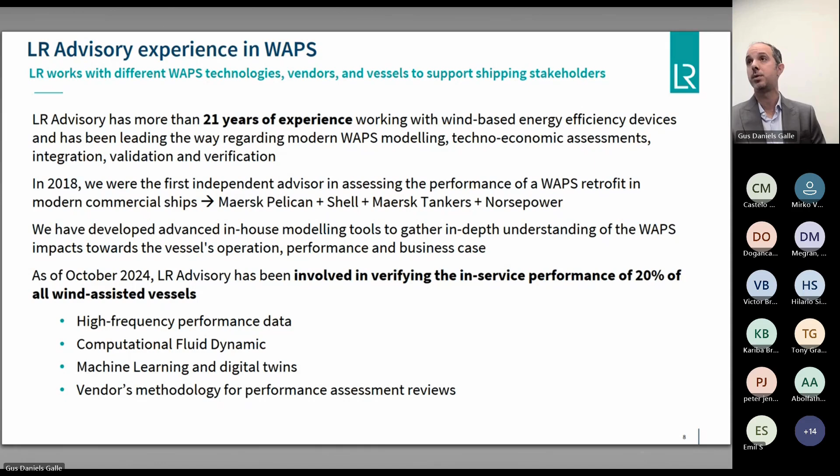And I think the best example of that pathway is the one that we have with Wisby Tankers, LDC, and bound4blue. When we started with LDC, they asked us, is wind propulsion for me? And we went through the operation profile of the vessel, trying to understand what is the opportunity that they have. Then we sent questionnaires to different vendors to ask, what is the performance prediction? What is your business case? With that, we gave insight to LDC so they can make a decision out of that.

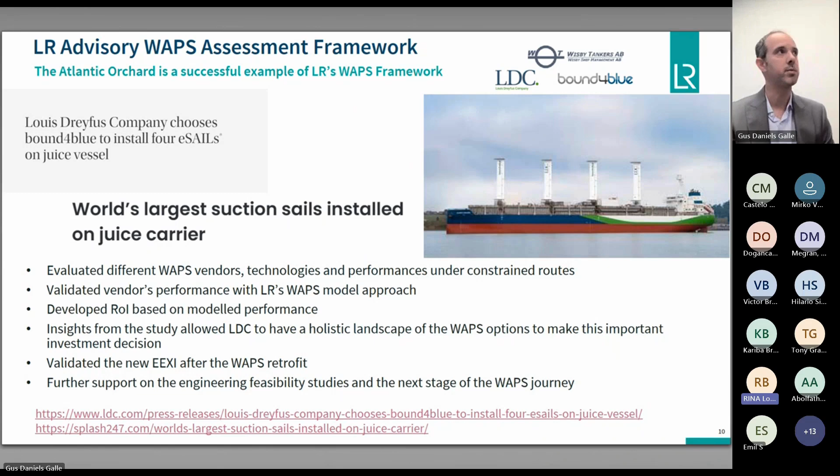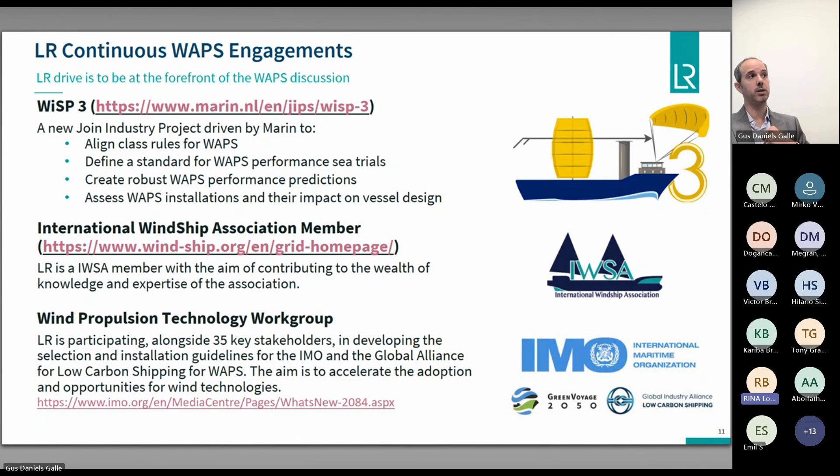And as well, we're part of different projects and initiatives. So to support the adoption of wind propulsion, we're part of WiSP3, led by MARIN, to try to consolidate class rules to create robust wind propulsion predictions for everybody to adopt and trust the numbers that are produced. We're also part of the International Windship Association, and we are supporting the production of the first guidelines from the IMO on the GreenVoyage2050 Global Alliance for understanding how to deal with wind propulsion systems. So we try to be really active in the field to support what our clients bring to the table, so that can be reflected in the general guidelines.

So now entering the topic, what is the landscape where this is based? CO2 emissions, at least from the last report that we have with robust numbers, are going up. They're not going down. And you can say, well, shipping is growing as well, right? Yes, but CO2 is growing a little bit faster than the capacity that is being built. If we then analyze the distance that all the major ships are covering in 2024, it stays more or less the same. It hasn't changed.

Of course, you have the Houthi conflict, probably that's going to change that visibility a little bit. But overall, if you put all of this together, the carbon intensity has stayed the same for 10 years. With all the policy that has been brought, with all the energy efficiency, hydrodynamic devices, hull coatings, it has stayed the same. So the industry is facing a challenge. There's a fragmented landscape of regulation. You have the market-based measures, regional and global with the IMO. This week, let's see if the IMO decides on the midterm measure. I don't think so, but let's see what happens.

Then you have compliance, and inside compliance, you have voluntary schemes that motivate or support clients that want to be more proactive on the energy transition, to move in that direction and have some guidelines on a more aggressive trend. And then you have more regional draft regulation. We don't know if they're going to happen, especially with the geopolitical situation. Especially the US, probably it's going to be put in the freezer for a while. But these are the challenges ship owners face as the energy transition starts to mature.

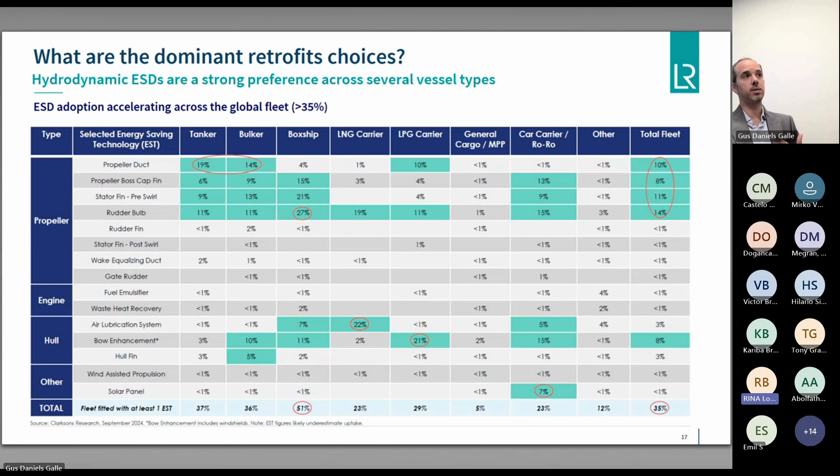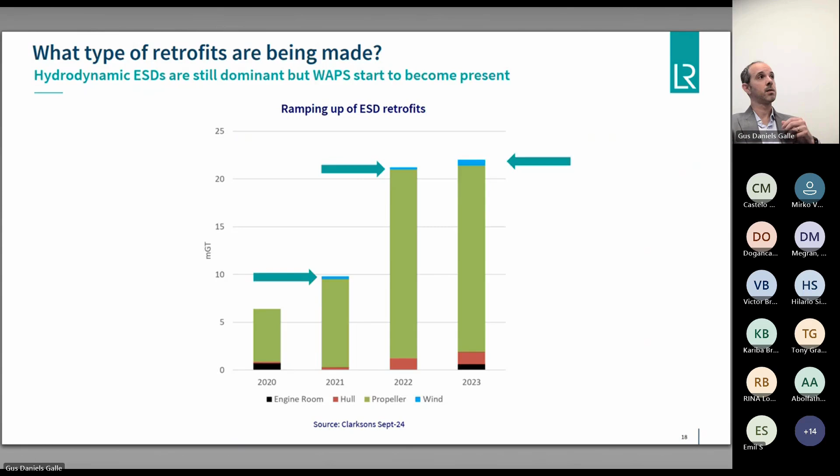So we can see that wind propulsion is getting a really interesting acceleration, probably similar to what we saw with ALS back in 2015 to 2018. So it's getting that traction. Again, vendors are maturing. The answers to the questions are coming out into the public domain. And that engagement allows confidence in the market as a viable solution.

And I just have to mention that, depending on the economic conditions, where you're operating the vessel and what your economic situation is, wind may or may not be an answer. So it has to be assessed on a vessel by vessel basis, because it's not a rule of thumb that I'm going to put wind propulsion on all my ships. It has to be assessed for each particular vessel because there are dominant factors that push the decision to one side or the other.

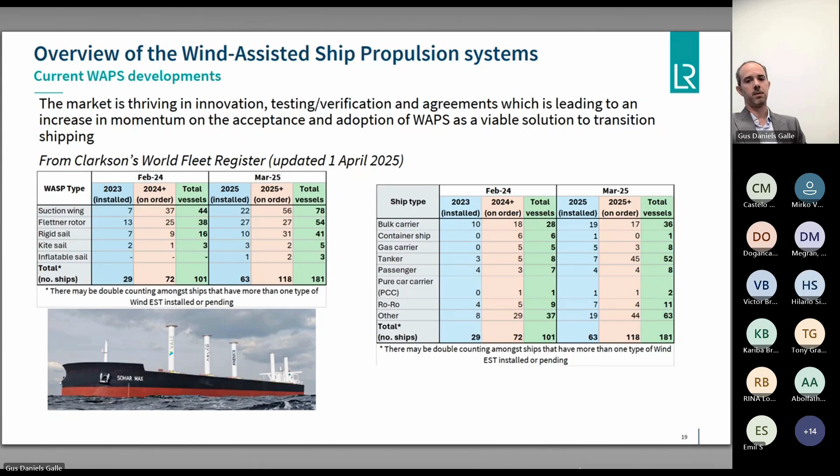So there are reasons why we think wind propulsion is starting to look promising. It can be retrofitted to existing ships or incorporated into new builds. It reduces the dependency on fuels, either fossil fuels or expensive alternative fuels. You have lower OPEX and lower emissions. Wind, as I mentioned, is no stranger to shipping. There's a lot of history there, so there's that romanticism coming back again.

The solutions I've mentioned are becoming more credible, and while it adds complexity to the system, it's not as complex as other technologies, and this is something that is being considered, especially when you think about the crew and how you're going to operate in port. This is kind of a game changer as well. And of course, we have really interesting routes that are pro wind that are becoming the first routes to promote that. As capex starts to go lower, probably more routes are going to become attractive.

And I think finally one of the biggest drivers, at least from our perspective, is the reward factor from FuelEU. Prior to 2023, before it was confirmed, wind propulsion was probably 10% of our questions. Now, after this, it's around 50% of our questions, because FuelEU managed to make that business case for different owners, or at least raise the curiosity to say, okay, we want to move forward.

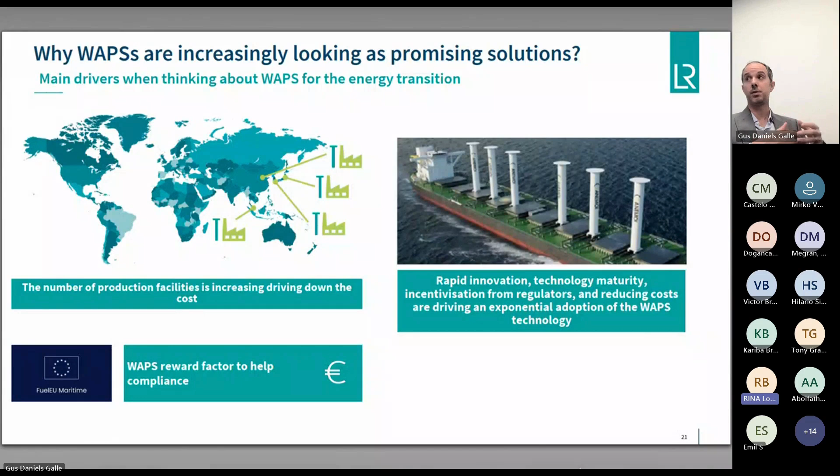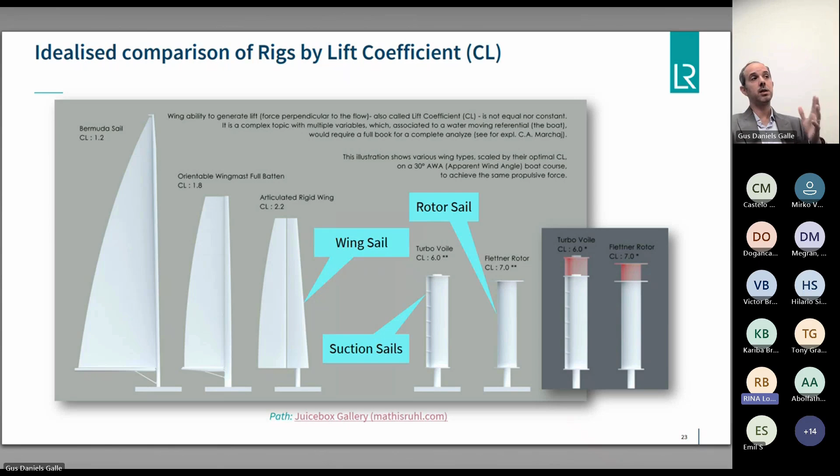In particular, with suction sails and flettner rotors, you have to consider the amount of energy you need to operate these devices. But if you compare the lift coefficient to a traditional sail from probably 200 years ago, you are 6 or 7 times more in that same wind condition. But again, it depends on the wind condition. Each device has different capabilities, and one single number doesn't give you the full picture.

So entering a little bit more into each of the families, we decided to put the soft wings and the rigid sails in different classifications. With the soft wing, you have a soft surface that allows you to do furling and adjusting depending on the weather conditions. There's an inflatable option, mainly Michelin, which has a telescopic mast and an automated system to inflate and deflate depending on the operation. If there's a port air draft restriction, it can go down or up. The same happens with Ocean Wings, which is collapsible.

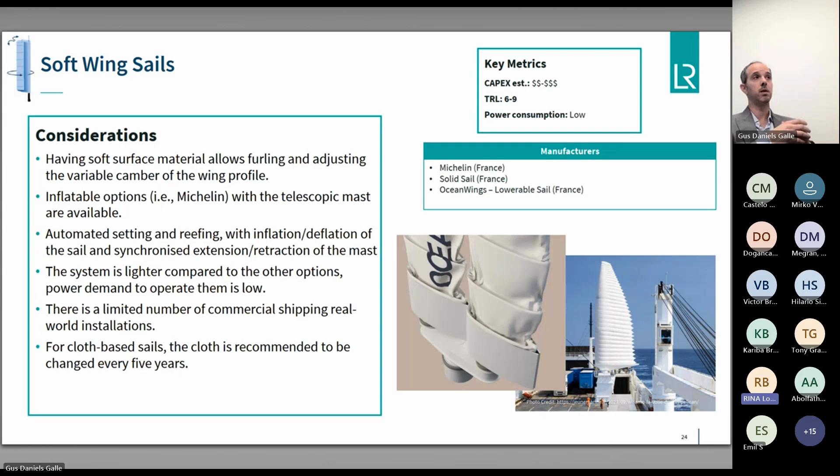The challenge is that there are few commercial installations, so there's still a lot of lessons to be learned. And in particular with the cloth ones, after a certain amount of usage or 5 years, you need to replace that, so it's an added OPEX. There are 3 main companies working on that, the price is probably medium to expensive, and the TRL levels are between 6 and 9. There's a lot of innovation still in that space.

When we move to rigid wings, they have a much higher lift coefficient compared to the soft sails. With optimum angle of attack and full camber, it probably fluctuates 2.5 to 3. But this is evolving constantly, so it needs to be reviewed with the different designs coming to the market. Rigid wings augment the thrust they can deliver by enlarging the surface area, and because of that, manufacturers are pursuing lightweight solutions, as BAR does, which reduces a lot of the impact of the mass on board.

One side effect is that, compared to a rotor, they tend to be a little bit heavier. Again, pinch of salt, there are different vendors and different solutions, so it's not a rule of thumb, just an observation. They don't consume a lot of power. It depends on how much they are changing the angle of attack and the flaps, but it's going to be much lower than a flettner rotor or suction sail.

It has automated operation systems similar to other families of products, and some initial design ideas I remember were combining it with solar panels. I haven't seen anything commercially viable on that front, but there were some concepts. I think it's the sector with the largest number of vendors, so it's quite crowded in that respect. The price goes from medium to high. TRL level, again, there are some companies at level 8, but the majority are at level 9.

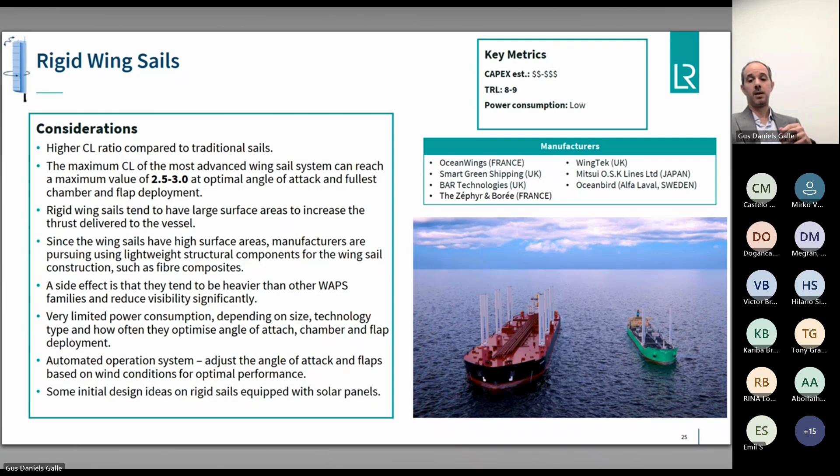And moving to Flettner rotors, the maximum possible thrust, thanks to the Magnus effect, is on beam winds. The rotating speed is automated, and the system modifies the spinning speed depending on the maximum benefit that you want to produce, depending on the wind condition. The rotating cylinder is normally laminated fiberglass or carbon fiber. That reduces the mass of the system. It can deliver really high lift coefficients in the right wind conditions.

The innovations that we have observed are the ease of installation, which is a really important factor with the clients, and as well the rotor aspect ratio to improve the thrust delivery. They're foldable, and the rail system is really interesting. The rail system allows you to have that versatility when you arrive at the port, especially for bulk carriers. The current market offering has already applied the lessons learned from that first generation of rotors. So we're seeing lessons learned applied to cost, energy efficiency, and thrust enhancement.

It's important to consider the amount of power that they demand, especially on multi installations, for example Sohar Max. It has five, ramping up at the same time. It's a strain on the system, but it's something that needs to be considered in the design stages. And they're compact. They don't need a lot of area to install, so that's an advantage where there's small real estate on the deck.

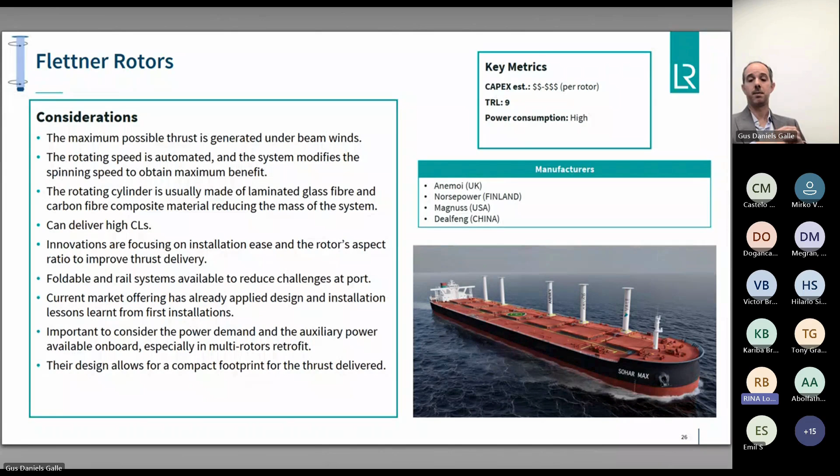Moving to suction sails, again, similar. They have optimum performance in side winds. They can be fixed, containerized, mainly with eConowind, and they can be foldable. Suction wings can develop lift forces of magnitudes close to the rotors, but with smaller aspect ratios. And it's important to consider that the optimization is with the angle of attack, the fan speed, and how the flap is being operated depending on the wind conditions.

And while the concept has been around for several decades, since Jacques Cousteau came up with the concept, there's still ample room for innovation in this sector. Quite interesting. One company has been innovating a lot on the manufacturing cost, which has given some advantage in that area. Again, this is innovation, and we're seeing it across all the families. There are really clever people working, and they're coming up with interesting ideas to cover the gaps in the market. There are three main companies at the moment. The newest one is GT Wings, which is right now on sea trials, and we're really curious about the performance of those devices. They are UK based.

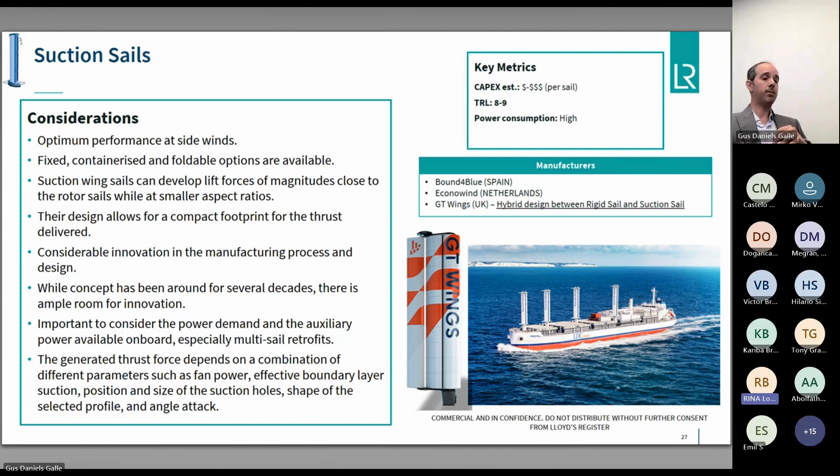Moving as well to kites, which pre-2008 was probably the wind device that was in everybody's mind. There has been recent advancement on how to improve the automation and how to control the system. It has moved to concepts that are navigating at higher altitudes to reach that more constant and faster wind resource, and they're using figure eights to try to generate that thrust. They don't need a mast, so it's easy to enter the port. There are not a lot of issues with port activities because it's quite compact and normally is installed in the bow.

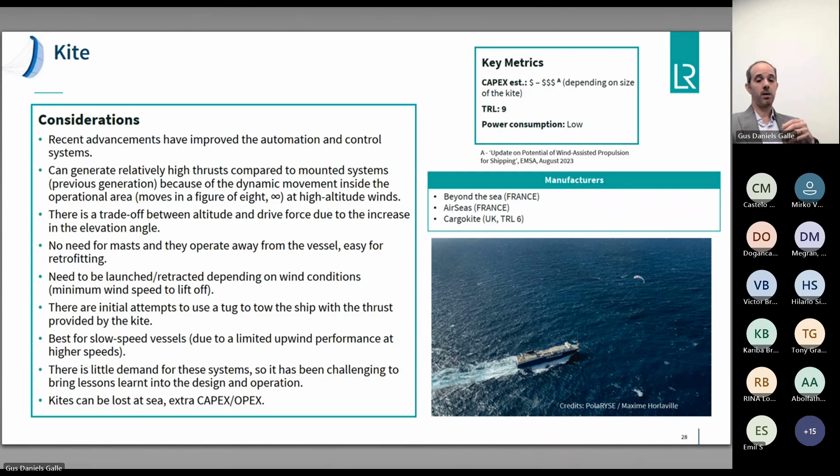So now with real world savings, and I think this is something important to consider, because you will hear in the news that this vessel saved 8% fuel, this one 5%, and you try to connect that device with that fuel saving. There are so many factors determining the fuel savings. It starts with the ship type and size, and there are a lot of variables that change that analysis, right? What is the deck space available? What is the type of fuel consumed? How much fuel is consumed? What is the remaining life of the vessel? Then as well, the route.

Are you on a spot charter or a time charter? Are you repeating the route all over again, so you have some confidence that it's going to be repeatable, or are you going to be all over the world, so you have to take a little bit more risk if there are no favorable winds? What are the air draft limitations in the port? What are the penalties and rewards that route brings to the table? Then, depending on that route, what is the wind resource?

Is it good enough for what you are expecting to have? Then the other part is the ship speed and the direction. What is the operational speed that you have to comply with? Is there a schedule that you have to fix? Are you going to think about installing weather routing on the vessel? And this is totally different. One is the wind propulsion device, and the other one is the weather routing. So are you thinking about that?

Then, what type of device are you going to use for that vessel? How many are you going to go for? Are you going for a pilot test, or are you going for the whole thing just to try to maximize that? And based on the installation, what is the thrust delivered minus, in case the system demands it, the power demand to get that net power?

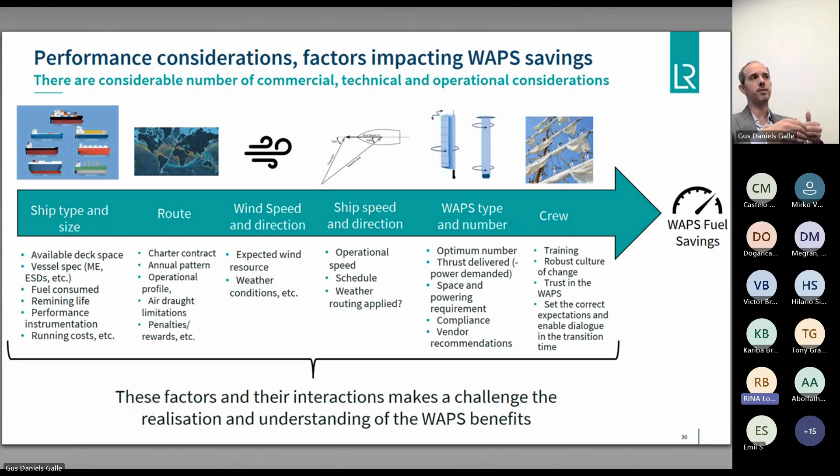And that's where we come into play, to support people who are thinking, is wind propulsion for me or not? Or, I have already installed it, how can I enhance that performance? And that's why we don't like rules of thumb much with this type of device, which is really sensitive to a lot of variables. It's important to have a rule of thumb, to have an assessment, but always go a little bit further with wind propulsion to assess the real benefit that you can get out of it.

Based on that, the first one that I want to present is the Maersk Pelican, which we did in 2018. This was a project funded by the Energy Technologies Institute, and it was a project of around 24 months. The first 6 months were planning how we were going to work this out, but in the end, measuring data, it was 18 months. The vessel was installed with a continuous monitoring system. We tried to monitor all the channels, gather all the information, and then we decided which variables were going to be useful or not.

So we needed to create a baseline of the real vessel without the retrofit. So we spent 6 months letting the vessel operate normally, and we created that baseline with continuous monitoring data every 15 seconds, aggregating the data in 10-minute blocks based on ISO 19030. And then after the retrofit, 12 months of measurements. We compared how the speed-power curve was changing. We corrected for weather. We incorporated the power consumption, and all the factors like hull fouling across the year were deducted. So in the end, what we wanted was a level playing field of the condition without the sail and with the sail.

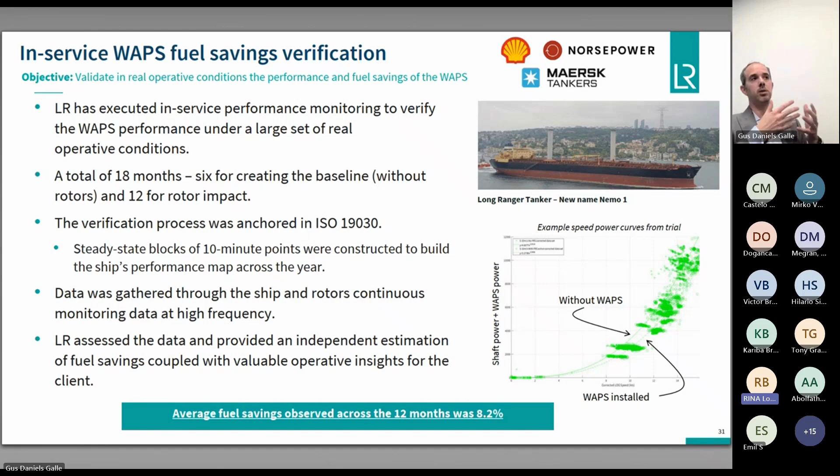After finishing the project, we assessed the installation, and you can see this is a long range tanker with only 2 rotors. This is a pilot test. It probably could have 4. It achieved 8.2% average fuel savings across the year. And again, it's a really attractive number, but we need to look a little bit more under the hood to understand what is going on.

And the best case that we have is the same route from the UAE. The same route, different operational speed, same direction, different time of the year, different weather. In the first one, we saw 1.4% fuel saving because we had headwinds and head seas. Then when we went back 4 months after, 12.2% in calm weather. So you can see the difference. But when we look at the data again, and that's why percentages are probably not quite what you need, we see that the Flettner rotors, of course, are not going to perform that great when you have headwinds.

When we see the thrust delivered, it was not that far away. What happens is that the vessel needed more power to move ahead, but the wind device was delivering what it was meant to deliver. So that was working well, and the fuel savings were the same amount in absolute terms. The only thing is that you're consuming more fuel because you need to fight against the weather.

So for purposes of complying with the regulation trends, which is going down every 3%, percentage is what you want to hear. But in real, absolute terms, you have to look at what power is being delivered or how much fuel per day the device is saving.

The report was public, but the Energy Technologies Institute closed the website this January. So I'm trying to figure out a way to have that report and share it with whoever wants it, but you have to give me a little time because it's a governmental institution, so it takes a while to get that.

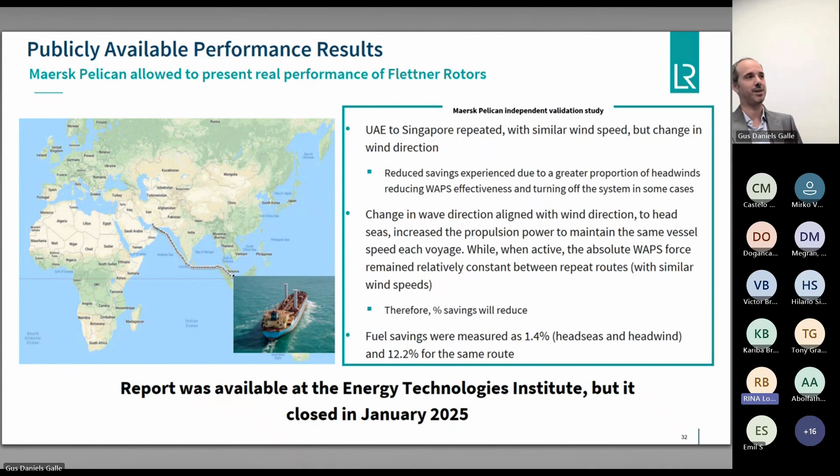So from other verification, this is the last 18 months on projects verifying that we have ongoing. We've learned a lot of different lessons. The first one is that aerodynamic optimization is quite key at the beginning of the installation, and this allows you to maximize the time you operate the vessel at the best performance possible. As I mentioned, crew and operations team is really important to have on board.

In general, with whoever we work with, they are super highly involved. They are quite clever, open to discussion, and figure out differences that we see in the data and how they approach the problem. This gives a lot of confidence to the stakeholders investing in these kinds of technologies.

I think compared to other sectors of ESDs, this is one of the really nice parts of wind propulsion: the openness to collaborate and push the concept forward.

The other lesson is that a well-instrumented vessel produces more valuable insights and fewer data issues when running, especially in the long term. This gives you less uncertainty as a stakeholder investing - you want that certainty in your data.

So at the moment, in the last 18 months, we have five projects. One finished, which gave an average of around 5.6 - it was on-and-off testing, and we validated the vendor's methodology. We have one suction sail, two rotors ongoing, one about to finish, and the hybrid suction sail, which is just a 3-month project, and we're 1 month into that. So we hope to have some answers before the summer begins.

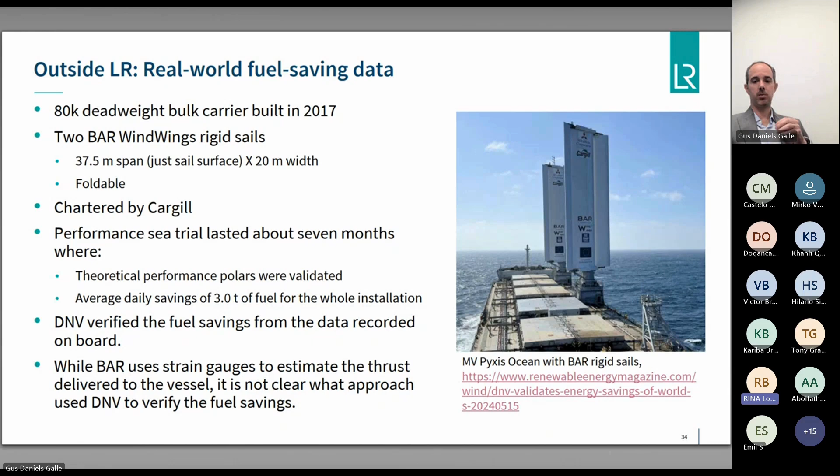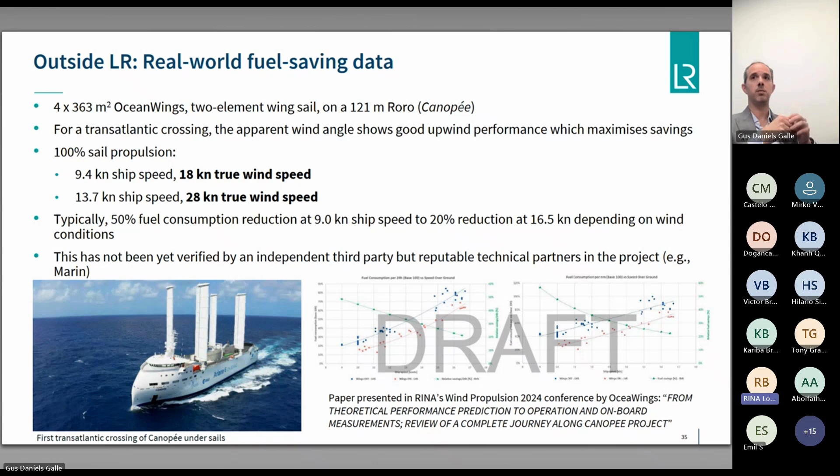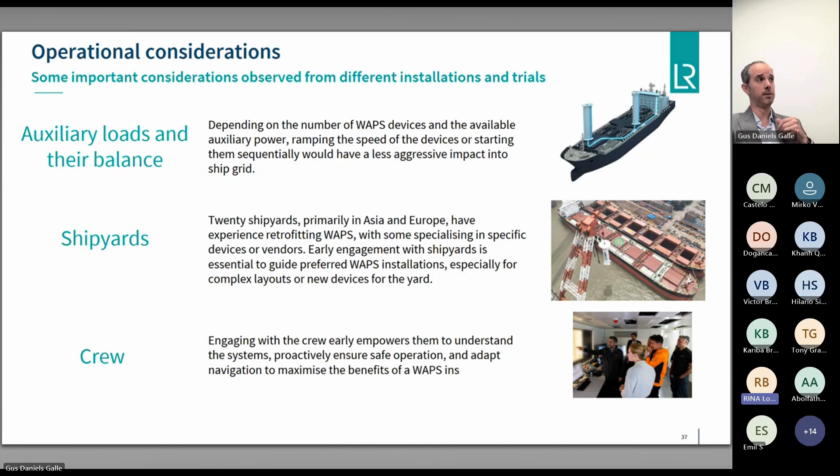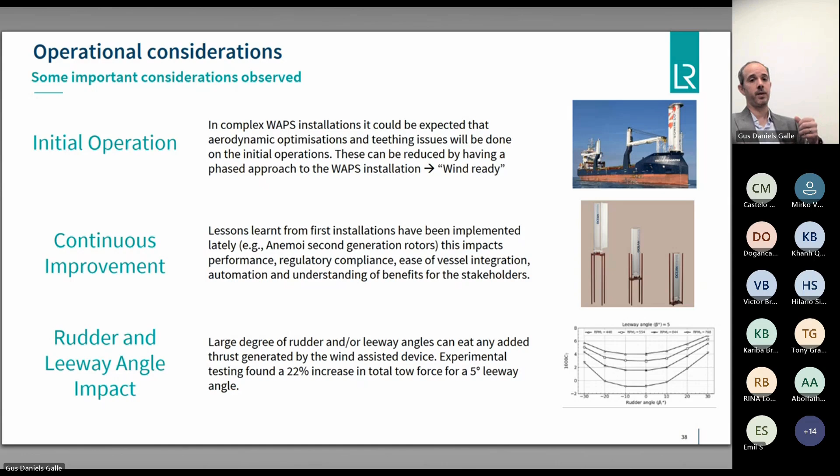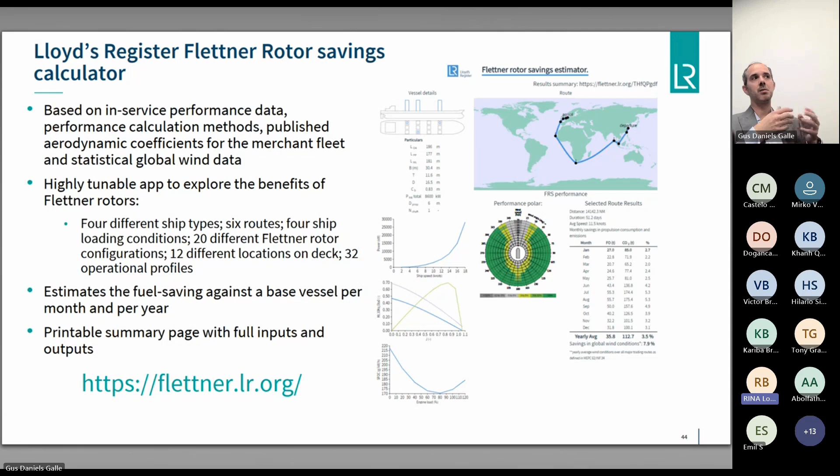So this is free to play with. The precision probably isn't as great as what a vendor could offer or our more advanced models, but it gives you a really good sense or sensitivity of what they can do. And I think with that, I have finished. Thank you very much.